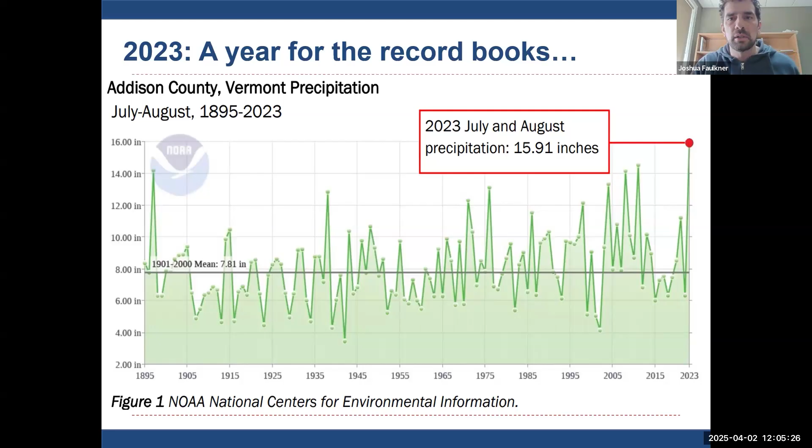So of course, this was not just dealing with flooding during that year, but also just really, really wet, excessively wet growing conditions once the rain started in early July. And then of course 24, this is a photo of Joe's Brook Farm in Barnet. We had drier conditions than 23 in some parts of the state, but wetter conditions in other parts of the state. This is a storm that dropped just over 8 inches in 24 hours in the St. Johnsbury area, which just shattered the previous 24-hour record as recorded at the Fairbanks Museum and Planetarium.

So again, just a couple reminders of why we're interested in dealing with water management and finding drainage solutions for our farms. I think there's more of these wet growing seasons in our future. But I will remind us that we are in New England. It's never been an ideal place to farm. This is a quote from the Vermont Ag Experiment Station of 1912, and I'll let you read that.

But this has always been a challenging place to grow because of moisture, and to some extent because of heavy soils in some parts of the state. So farmers were not the first ones to deal with these issues, although the intensity and magnitude of it may be greater than it was back in 1912 when this phrase was coined. Okay, so what can we do to deal with saturated soils in fields?

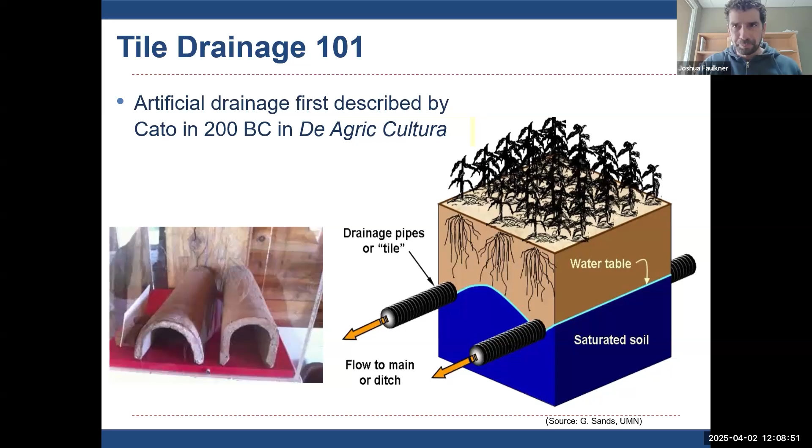One of the questions that inevitably comes up is, well, I'm interested in draining my fields, but I don't want to over drain. I don't want to remove water that would be available to crops when we inevitably have that dry July or August period later in the summer. And that's really not the case. What tile does, it removes what we call free water, or water that can be removed via the forces of gravity.

A good way to demonstrate this is if you think about a sponge, and you put that sponge in a bucket of water and fully saturate it, and then you pull it up out of that bucket, and you don't squeeze it, you just hold it. All the water that runs out of that sponge without you squeezing it, that's the free water. That's water that's removed just via gravity. And that's the water that the tile drains would remove from your soil.

The water that's left in that sponge is the water that's available for crops. That's referred to as your available water capacity, what was held after that free water drains. And if you take this analogy a step further, if you squeeze that sponge and squeeze more water out of it, that's analogous to what plants would do; your hands squeezing it would be the action of the plants removing water from the soil.

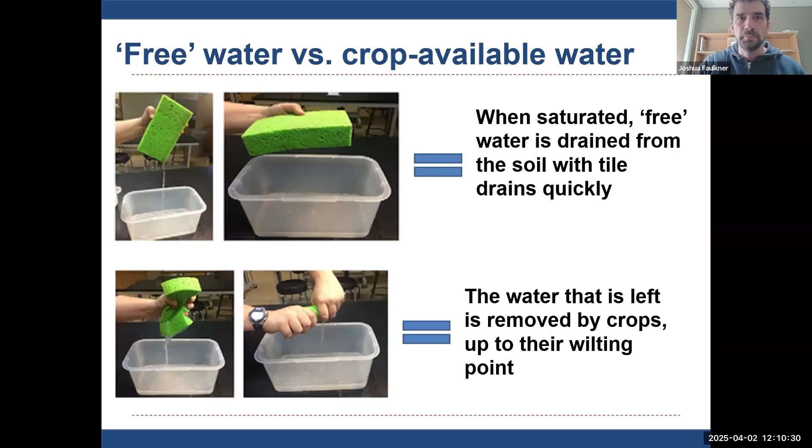So drainage has two primary benefits. We'll talk about a couple other minor benefits, but of course it improves crop production. Most of the data we have on its ability to improve crop production is in field crops. It's very hard to find this for specialty crops, for vegetable and fruit crops, but of course it functions the same way in those types of crops as well.

One way of thinking about this is it helps get a farm off of a roller coaster of really poor years and really good years, and levels out production, because it maintains consistent yields year over year, as long as there's adequate water and other crop inputs like fertility.

And then the second benefit of drainage is it improves trafficability. In many ways, this can be as important as literally lowering water out of the root zone and preventing damage to crops from saturated roots, because it allows farmers to do what they need to do when they need to do it, whether that's in the spring or midsummer or in the fall. Those trafficability benefits often translate directly to improved yield. So they shouldn't be ignored.

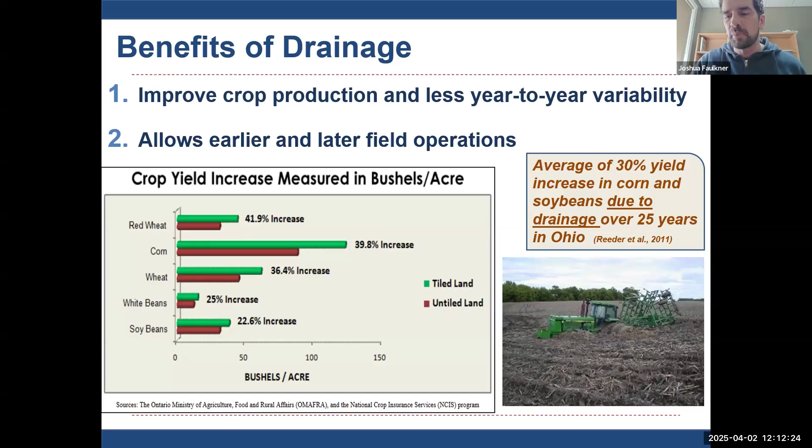And then I have some yield data there from drainage studies, if you're interested. One is from Ontario, so I tried to pick data from as close to Vermont as I could find, and the other is just from the longest running drainage study that I'm aware of. And again, I apologize; these are all field crops, but it's hard to find this for vegetable crops.

Another minor benefit, I guess I'd say minor, but it depends how you look at this and what your soil textures are on your farm, but drainage can help reduce compaction. And really the way it functions to do that is it reduces soil moisture. And we know that bearing pressures from heavy equipment travel deeper into soils when that soil is moist. So if we can keep that soil drier, we can avoid those pressures compacting soils to some degree, and especially preventing some of the deeper compaction, which is the most difficult to remediate, down below the typical plow layer.

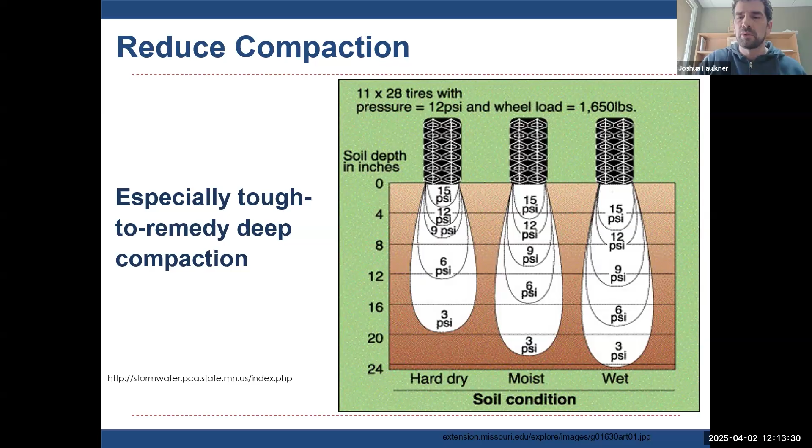And there's just a kind of a classic ag engineering figure there on your right that shows how those bearing pressures travel deeper in the soils when the soils are moist.

Drainage also, maybe a little counterintuitively, helps in the dry years. We of course would expect it to help in the wet years, but it functions in the dry years to keep the water table low in the early part of the growing season. So when crops are establishing their root system, they're not inhibited by a high water table. So those roots go deeper in the early season, so that later on in the late summer, when we do have drier conditions, those roots are deep enough that they can potentially access the deeper water table, and much improved production versus a shallow root system, of course, if that was in an undrained system.

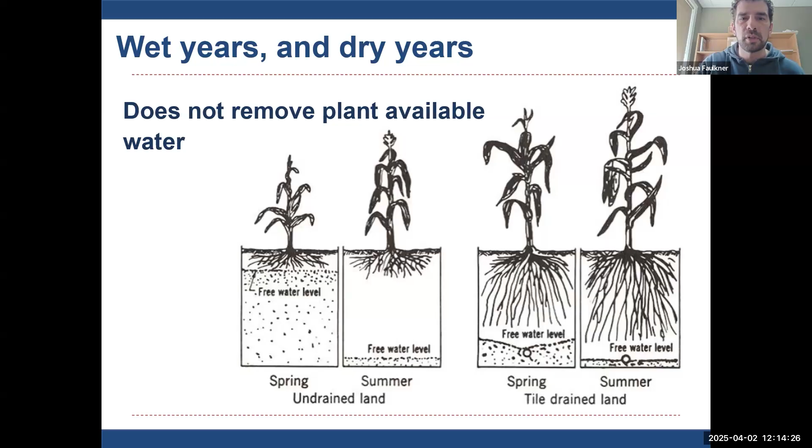There's various ways of doing drainage with tile. Modern systems are typically very pattern-like and systematic in their implementation. You can have parallel systems, you can have herringbone systems, double main systems with a ditch running through the middle of the field. All these different ways of doing drainage are common in both field crop and vegetable systems.

We also see a lot of random. If you look at the schematics on the left-hand side of your screen, the lower right is a random drainage system, and this is common in areas where there's a fair amount of topography in the farm fields, where you have distinct high areas and low areas within a field. Often you'll see these random or kind of erratic tile lines that just hit these depressional areas and drain those areas, and that can be very effective too. You don't necessarily need a pattern system if you just have a few problematic areas within your field.

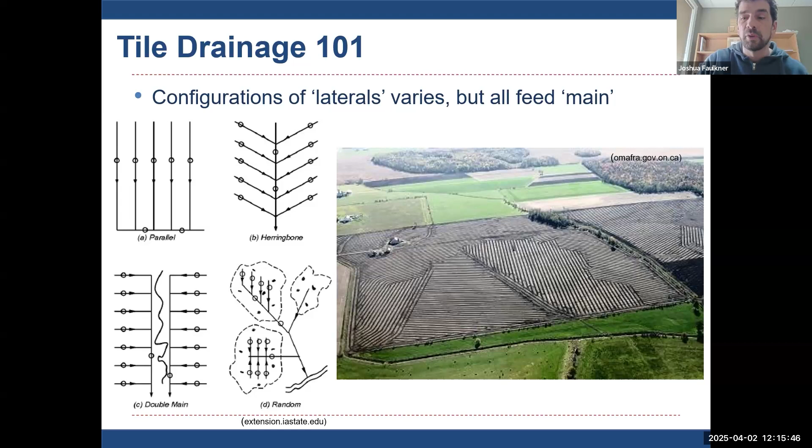So how do we determine what that spacing should be? There is an NRCS drainage guide. I don't believe it's still being published by NRCS Vermont, but other states have these drainage guides. I do have a copy of this if anyone's interested. These do provide some guidance on what drainage spacing should be, based upon the various soils in the state. You can also do a calculation based upon the soil texture.

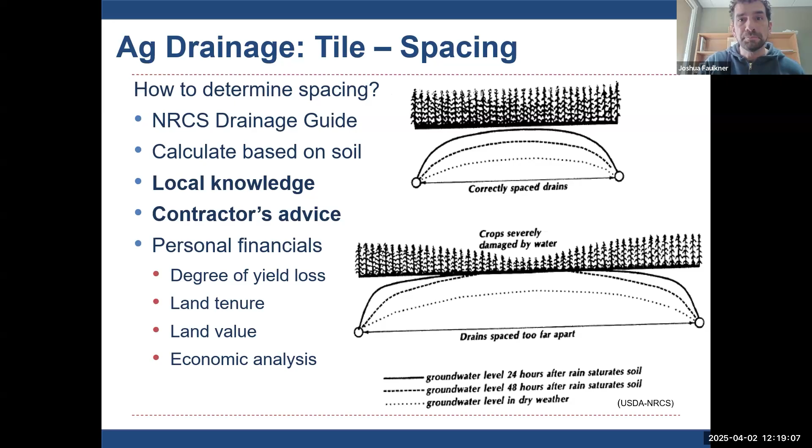Just another really helpful figure on tile depths and spacing, and how these function to influence water table depths and drainage rates within the soil. Really, spacing controls, this is the primary thing it controls, the time it takes to lower that water table below the root zone, so that the tighter the spacing, the more quickly we lower the water table.

And then the depth is important for a couple of different reasons. One, it controls the final water table elevation. And it controls the total volume of water drained. And that makes sense if you think all the water above the drainage tile would, in a perfect scenario, exit the field through the tile lines. So if we have a deeper tile, we have more water that would be drained.

The final water table elevation is important, depending on the texture of your soil. I think we all kind of intuitively understand that if we have a sandy soil, the water really isn't wicked up above that water table elevation very far, what we call capillary rise, because the pore spaces in the sands are so large. But in a clay, there's quite a bit of capillary rise.

If your water table is 3 feet below the surface of the soil, in theory, capillary rise in clays can be up to 3 feet. So you could see moisture that is wicked upward in clays all the way to the surface of the soil. And so typically in a finer textured soil, we might think about putting that tile a little deeper to avoid any influence of that capillary rise. So another important consideration.

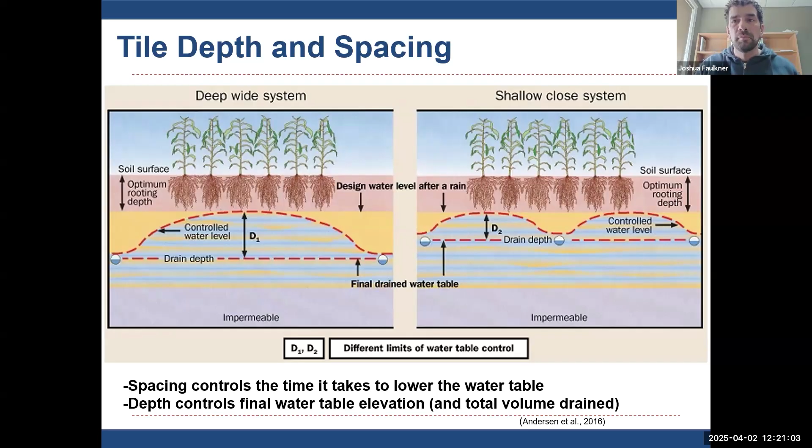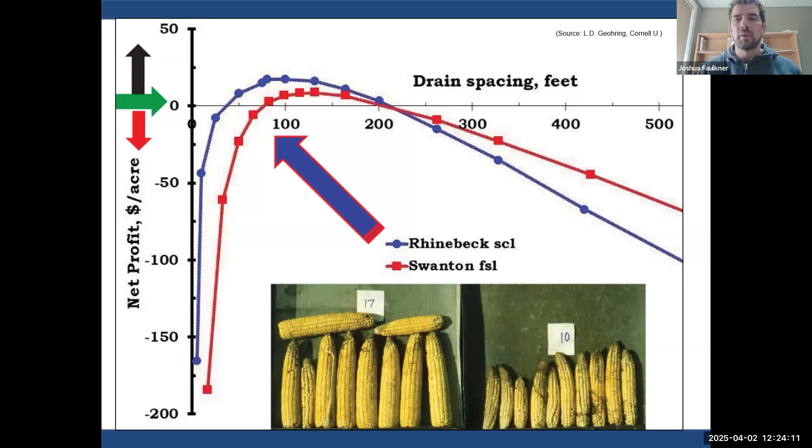So there's this optimum spacing for every soil, and we don't necessarily know what that is for all soils, and that's why I think it's really good to get closer to that answer through talking with other farmers or folks who have experience in Vermont in our soils.

Another issue, and I hear more and more conversation about this, is the use of sediment socks on tiles, or using sand slot pipes. There's quite a bit of discussion about this right now, and there's some great work from Ehsan Ghane at Michigan State University. If you're ever curious, I can send you a link, or you can look at the Michigan State extension site on tile drainage, and he does a lot of work with these different approaches to keeping sediment out of tile lines.

In general, sediment control is needed if we have sands, loamy sands, sandy loams, loams, silt loams, and silts. It's especially true if the soil has a fair amount of fine silts or very fine sands. These are particles that can migrate in the subsurface and into tile lines as drainage water moves into them. And if the tile line doesn't have adequate slope, the water doesn't move quick enough or carry enough energy, and those silt and sand particles can settle out and eventually clog the tile line. So some approach in certain soils is necessary to protect that investment and prevent clogging.

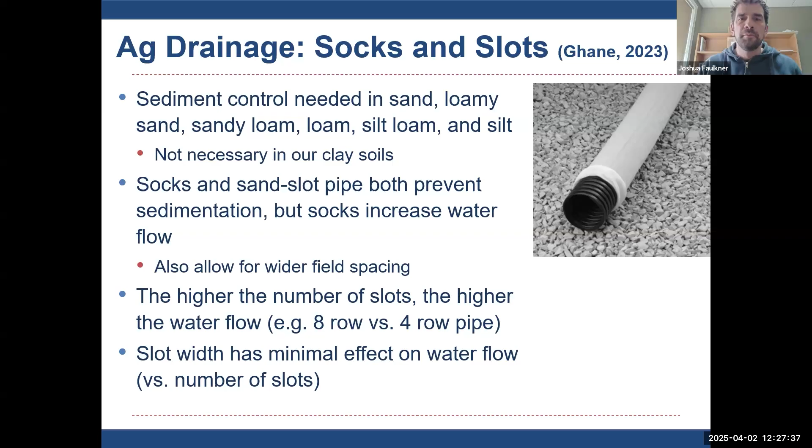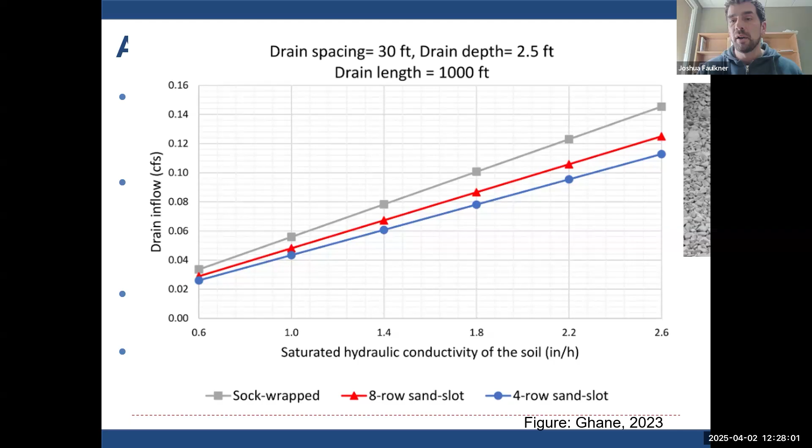And this is a nice figure that shows the difference in drainage inflow rates between a sock wrapped pipe, an 8-row sand slot pipe, and a 4-row sand slot pipe. It doesn't look like that big of a difference here, but across the area of a field, these flow rates are important. They're meaningful.

The important thing here, I think, is to ask your contractor about using RTK, real-time kinematic GPS technology. That ensures that tile is laid on a consistent grade or slope across the field. You can certainly achieve consistent slopes with laser levels with an old school backhoe excavating trenches, but for modern systems that move much faster, you need this kind of technology to make sure you hold grade. It's important you don't have dips and sags within your tile lines.

If you think about that intuitively, you think, well, the water will still drain even though there's a dip, there's still a slope, but those dips are where we see sediment gather if sediment does get in the pipe. So that's where we start to see clogging if we don't have a consistent grade across the field. It's just like a P-trap in your kitchen sink drain. You have that dip. That's where the solids gather, and they can eventually clog the tile line.

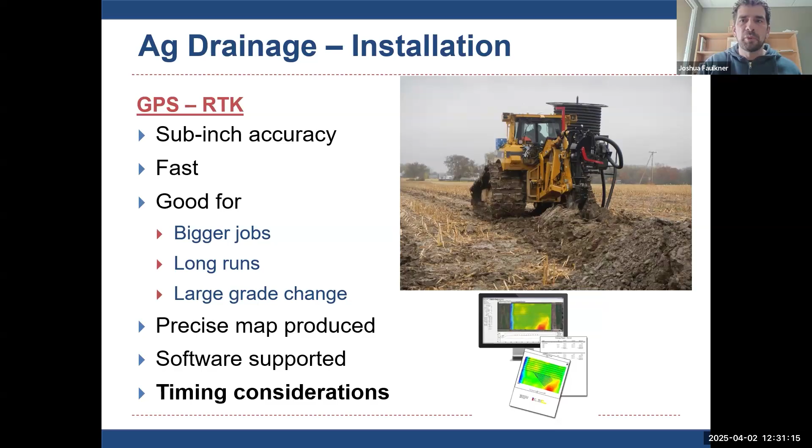Economics. So I had a couple more slides in here for folks growing field crops, and I took them out. They don't really apply to those in the vegetable and berry arena, because we have these different bushels of corn per acre, tons of silage per acre, and I just didn't have anything analogous for vegetables. But I think it's possible to think about this yourself and maybe get a rough idea of what your yield improvement might be with tile drainage.

If you compare it to the yield of a similarly managed field that is well drained, similar fertility, same production practices, so on and so forth, you can get an idea and maybe pencil out a comparison yourself. Or just think about that particular field, what the yield is in an optimum weather year. And then you might get an idea of what the yield improvement and potential payback might be. Don't forget the benefit of improved trafficability.

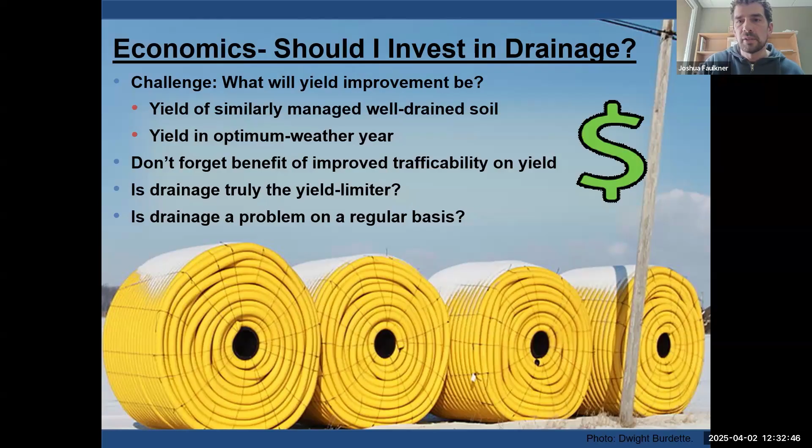And this maybe goes without saying, is drainage truly the yield limiter here, or are there other things that need to be addressed? And then is drainage a problem on a regular basis? No one knows the answer to that question, but certainly our climate change projections indicate that we're going to continue to get wetter and see these challenging growing seasons because of excess moisture.

Regulatory issues are important to consider when we talk about tile. And this applies to both USDA programs and EPA; the U.S. Army Corps of Engineers have regulations on this too. I find it best that if there's a questionable area of a field, or a new area that you want to bring into production, those are really where the questions come up, and it's really advisable to talk to USDA to do a wetland delineation before draining something that you think might be at risk of triggering one of these regulatory concerns from a federal agency.

And I think it's a conversation with your NRCS, and if something generally has been in production since 1985, it's not a concern. But bringing new areas into production is where we have the most concern with these.

Okay, and we can't really talk about tile drainage without talking about some of the environmental concerns. Previously we thought phosphorus all bonds tightly to soil particles and it doesn't move into subsurface drainage systems and with subsurface flows. But we saw that was not the case with some work done really starting in the Western Lake Erie Basin.

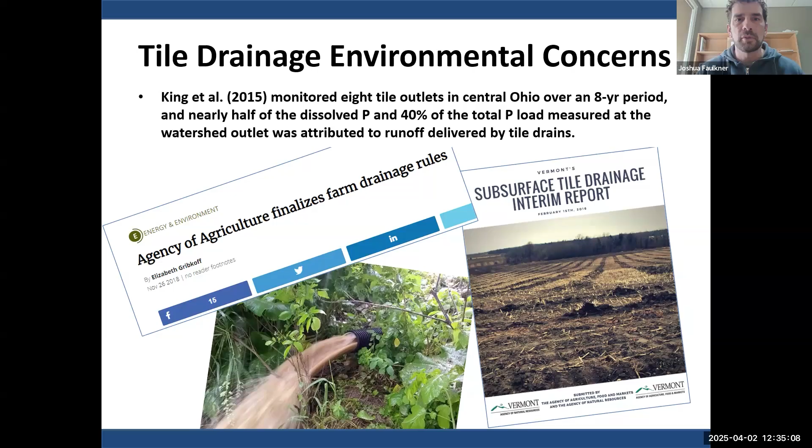And they saw drainage tile transporting meaningful amounts of phosphorus. And then we started to do some monitoring here in the Champlain Basin on our dairy farms, and we indeed saw phosphorus being transported in these tile lines. I haven't done any monitoring on vegetable farms, but it certainly stands to reason that we would expect to see some phosphorus transport from these farms as well, especially where soil test phosphorus is elevated.

The other environmental concern is around hydrology and how tile drainage affects watershed hydrology, peak flows, for example. There's been some cases in Vermont where this has been in the news, and I just want to show a slide on what the scientific literature says about this. In general, we think that tile drainage serves to dampen peak flows at the watershed scale.

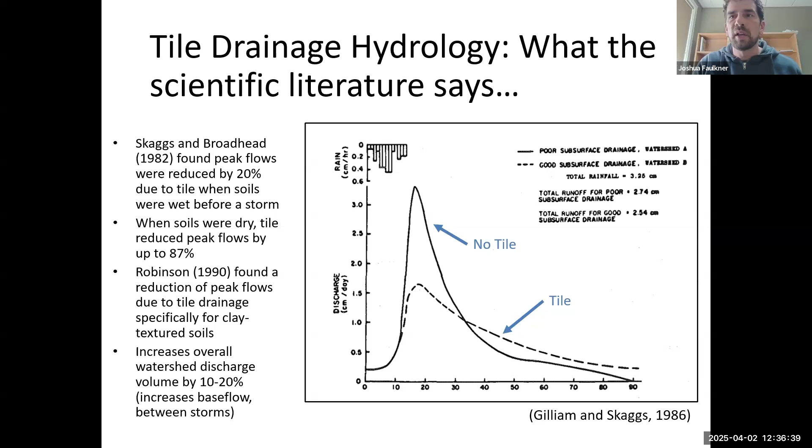The other thing I think important to note is that we do see more total water leaving a watershed when we have a lot of tile in it than when we don't. It increases base flow in streams by 10 to 20%. And I think it depends on your perspective whether that could be a good thing or a bad thing. So in terms of the environmental implications, it's complicated.

We don't know the answer to what is the net effect on phosphorus loss, because we know we decrease surface runoff when we put in tile drainage, so we decrease potentially the amount of erosion that's occurring off the surface of a field because we have more water moving through the subsurface. Certainly heard anecdotal reports of reduction in gully formation and gully erosion when a field is tiled. Improved yields in a field means more phosphorus is removed by the crop instead of remaining there in the environment subject to potential loss.

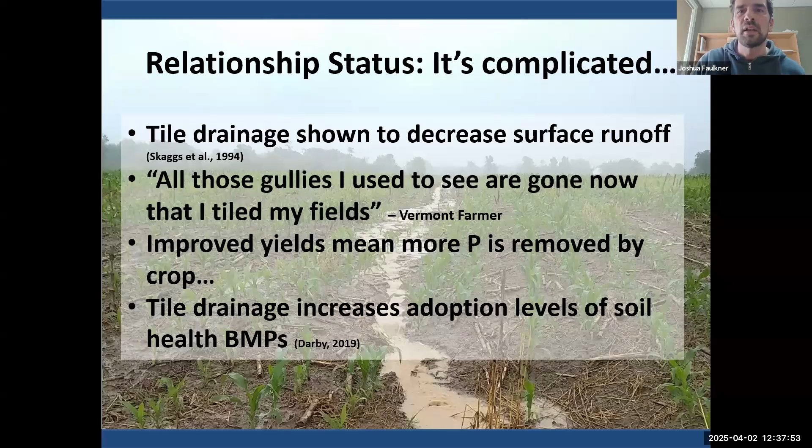And Heather Darby's done a little bit of survey work on this, where tile drainage, because soils are drier, increases the level of adoption of soil health best management practices, things like no-till without leading to compaction, or being able to plant cover crops because the soil remains drier later in the fall, things like that. So again, we don't know exactly what the net effect is, but we do know there are pluses and minuses, and it's complicated.

And then I just have a couple more slides on the environmental effects of tile. We have done some work because we know there is phosphorus leaving a field in the subsurface when it is drained. We've done some work with some filter systems to try to capture that phosphorus. And we've installed several of these on farms, but we haven't done one on a vegetable farm yet with a tile system. These are just designed to remove dissolved phosphorus in the water.

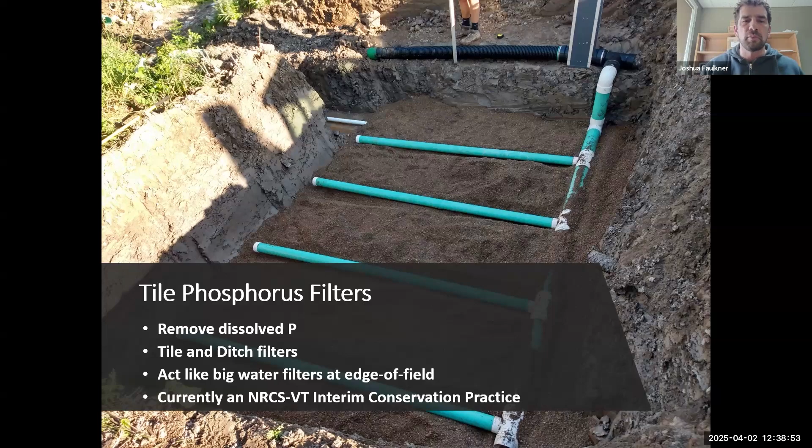They literally act like big water filters where we divert the water right before it's discharged into the ditch beside the field through a manifold, and then it filters through gravel media that has a certain amount of iron shavings in it, and that iron forms iron oxides and hydroxides with phosphorus and removes that phosphorus from the water. And this is currently a NRCS Vermont interim conservation practice.

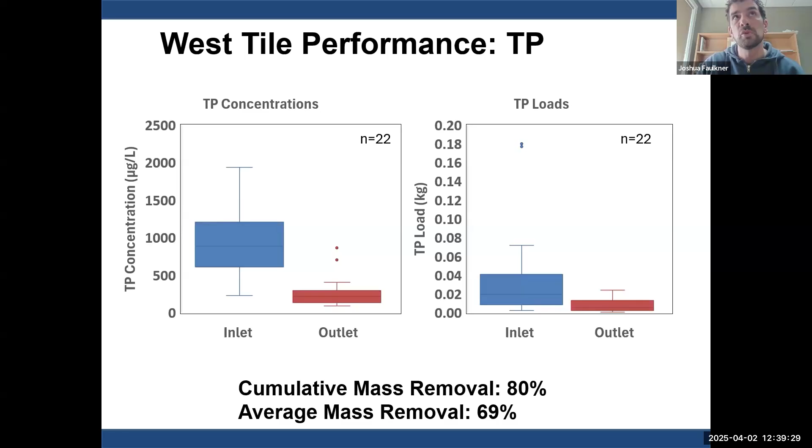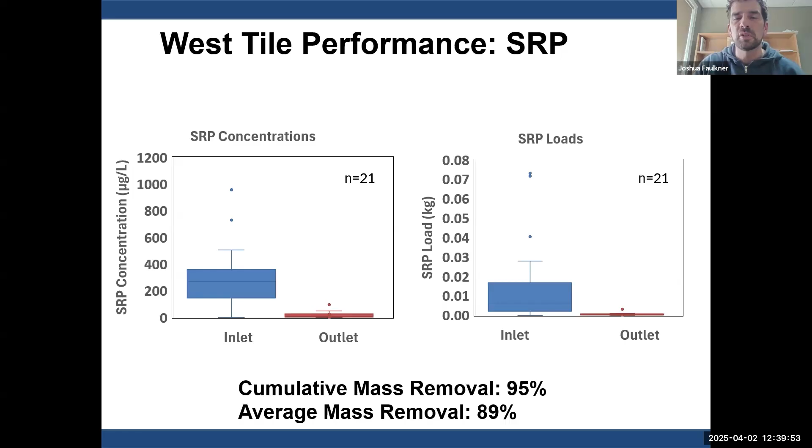And then even better results for SRP, which is our soluble form of phosphorus, soluble reactive phosphorus. Again, you see concentrations on the left and mass loads on the right. And here we've been able to remove about 95% of phosphorus. So we know there are some phosphorus loss pathways through tile systems, but there are potential solutions to address that as well.

Okay, so now I'm going to transition away from field drainage and talk about drainage around high tunnels. And this is often a little more complex and often pretty fun to try to troubleshoot. I get a lot of questions on this too, and go to farms and walk around production areas and look at, I think that's your first step, is really to look at where the water is coming from that is causing the problems in and around a high tunnel.

Sometimes it's literally just water coming from the roof of the high tunnel itself. Sometimes it's that old dairy barn that is just 50 feet away from a high tunnel, but slightly upslope, and you get all that roof water coming off of that barn and then flowing toward the high tunnel. Sometimes it's just shallow groundwater issues.

So it's a great exercise to take a fresh look at your production area and look at those impervious surfaces, both under your feet and over your head, and try to figure out where is this water coming from that's causing the issue within my high tunnel. Every farm is a very unique combination of these different puzzle pieces. So there's lots to consider.

And I will say, in some cases, there might be some engineering expertise that would be necessary, because we are talking about drainage networks around developed areas, your roads and your barns and your foundation. So engineering expertise might be necessary. And then, potentially less so here than in field drainage, there might be some regulatory issues.

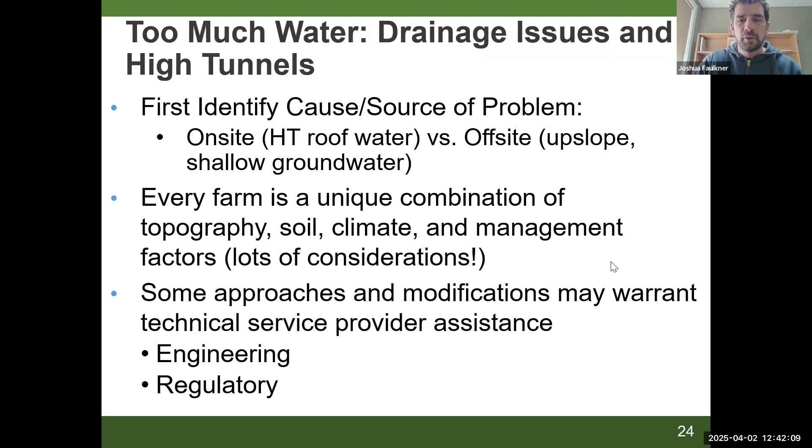Trying to create positive drainage away from the high tunnel is really important. We have a lot of water coming off of that high tunnel skin, off of that impervious surface. So we need to plan for that. There's a couple ways of doing this. One is we can build an elevated pad to put our tunnel up on. There's some disadvantages to that.

Often you're moving soil, you're disturbing the soil. You're potentially mixing in a lot of mineral soil when you put in that fill. So you might need to then do some work on the fertility and the soil health in this new fill soil that you've placed your tunnel upon.

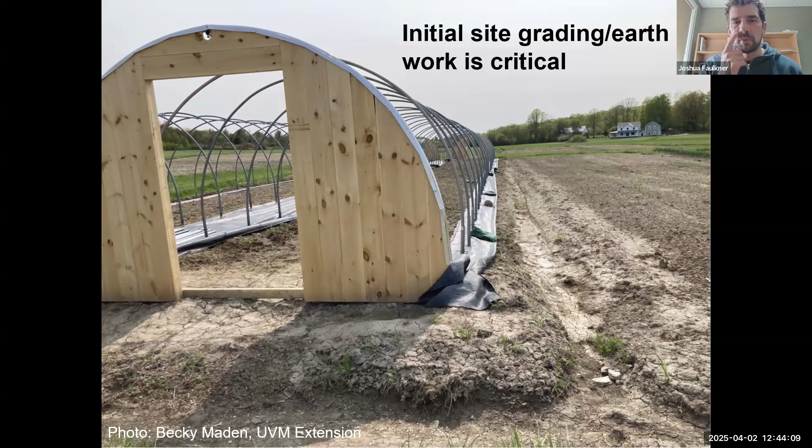And then the other approach is just to do some grading away from the sides of your tunnel in that existing grade, so that you get positive drainage away from it, but placing that tunnel on existing grade. So a couple different ways of doing that.

I think the other thing that I see a lot is tunnel spacing is an important consideration. As we put tunnels closer together, we restrict the ability to get heavy equipment in between those tunnels if we want to do some retro earthwork after the tunnels are in place. So just making sure we do any earthwork, perhaps forming swales in between tunnels prior to tunnel construction, is well worth that planning effort, because it's challenging to fix these afterward.

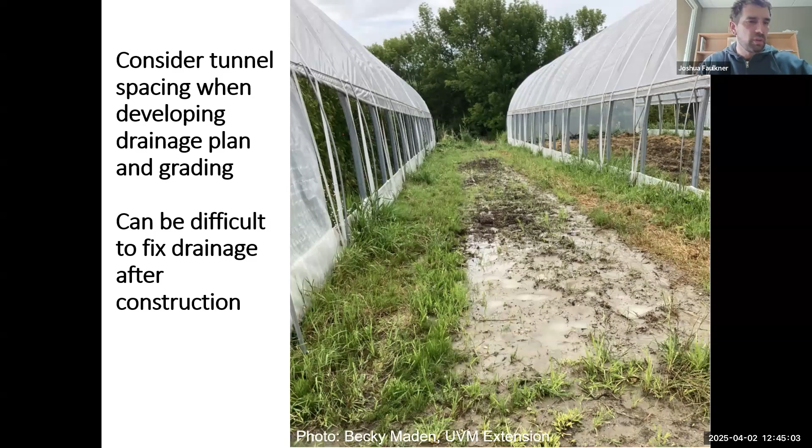And in between the tunnel, of course, you have water coming from two tunnels into that very narrow area. So you have quite a bit of moisture that you're trying to deal with.

One note of caution, we want to be careful doing this on existing tunnels. You want to make sure you stay at least 18 inches away from footers, whether pylons or footer walls on high tunnels, so you don't compromise the integrity of that foundation. But you can still do this and put this in after the fact.

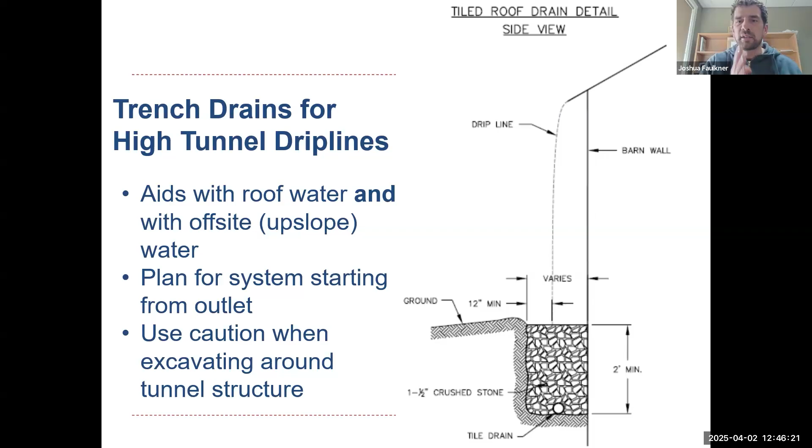The nice thing about these is they capture water running off the roof of the tunnel, and they also capture any subsurface water or upslope water that would be potentially running down the hill into a high tunnel, whether it's above ground or underground. This can help act as a curtain drain to cut that water off. So I really like these.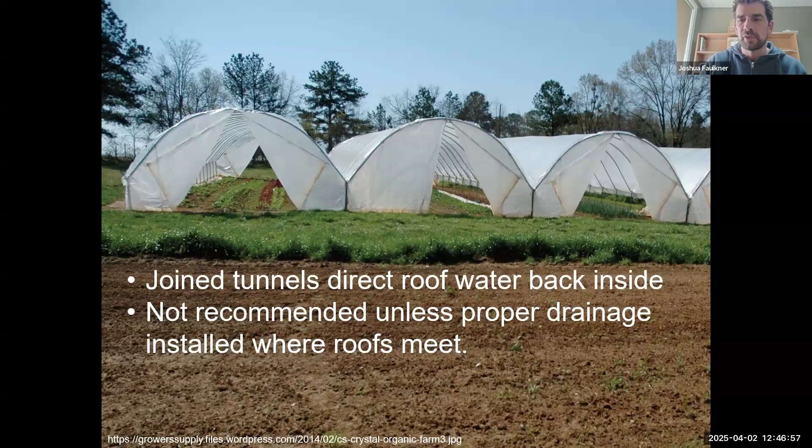And then one thing I've seen, which creates a lot of problems, is these joined tunnels. If they don't have a very thoughtfully designed gutter system in that V where the tunnels are joined, all of that water running off of the tunnel, either side of that V, eventually comes back into one or both of those tunnels and creates drainage issues. So I don't necessarily recommend these unless there is a good gutter system there in between.

And I think maybe my next to last slide here is just to pitch the importance of understanding your soils when you do any of these drainage interventions. Your soil texture definitely affects your tile drainage parameters.

And then the other important thing to note here, in a lot of Vermont farms that I see, especially outside of the Champlain Valley and the Connecticut Valley and the central area of Vermont, where we have a lot of hilly topography, we have soils that contain a fragipan or a really dense layer at about a 20 to 30 inch depth. If you have Cabot soils or Peru soils or Vershire soils, you have this fragipan in your soils, and this functions really on hillsides adjacent to growing areas.

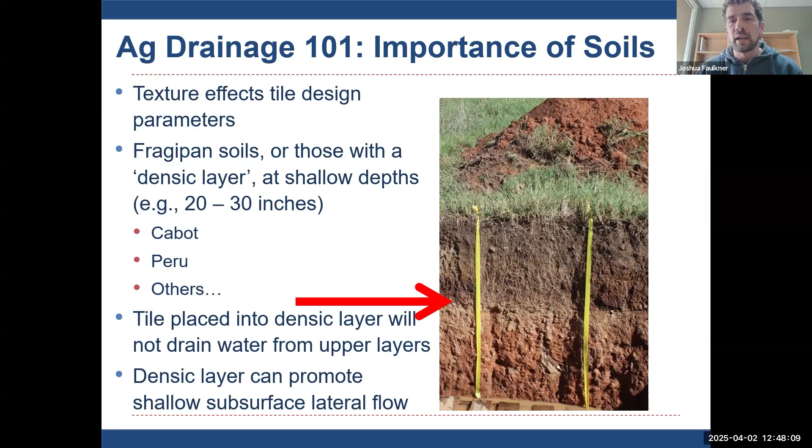Water will infiltrate in the upper soils and then hit this dense layer on that hillside, travel down slope, and then reemerge at the toe of the slope, often right in the growing area. And that can create a lot of problems. But it's somewhat easy to address with an interceptor drain.

And this would just be either a swale or an excavated ditch, or an excavated ditch backfilled with gravel where you have that slope transition from the hillside to the flatter soil, so that you're intercepting all that subsurface water that's flowing on that dense fragipan layer, and cutting it off before it can affect your beds in your growing area.

And this one is a big bang for the buck. I see a lot of farms where this has been successful, and where it's expected to work really well because they have these exact soils.